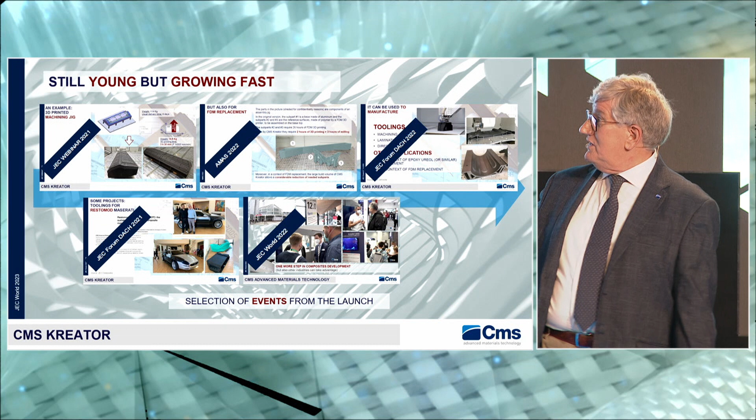Here you can see a selection of events where we have presented Kreator: the JEC Webinar 2021, do you remember the pandemic time? But also the JEC Forum DACH, and up to the last edition of JEC World last year, and the Forum DACH.

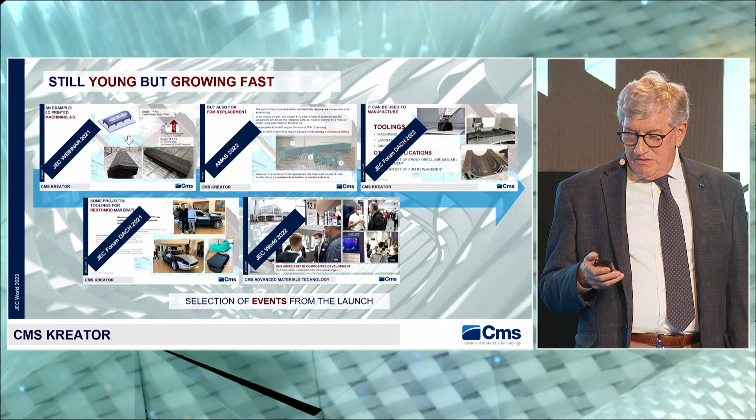The context is one of a technology growing fast. Do you remember, a year ago I presented the first slide coming from the Expert Digest of JEC Composites magazine, showing that the growth rate is more than 20% annually.

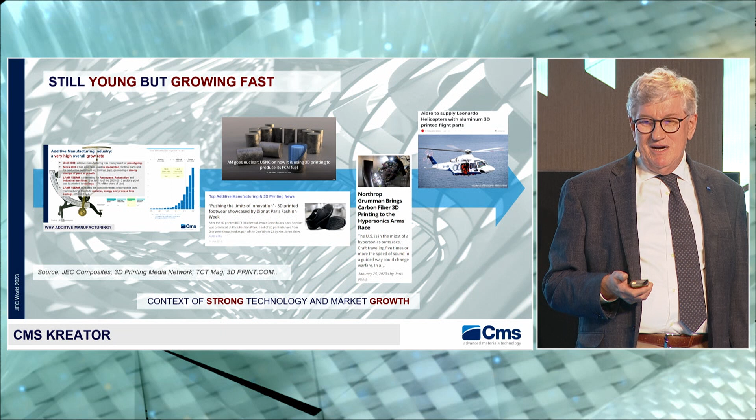But a lot of new applications have appeared in these years: AM going nuclear, nuclear fuel 3D printed, shoes - we have sport shoes 3D printed, but also continuous fiber 3D printed parts, and other parts for helicopters, for instance. And Kreator is also growing.

It's growing with a new 3D printing strategy, the 90 degrees 3D printing.

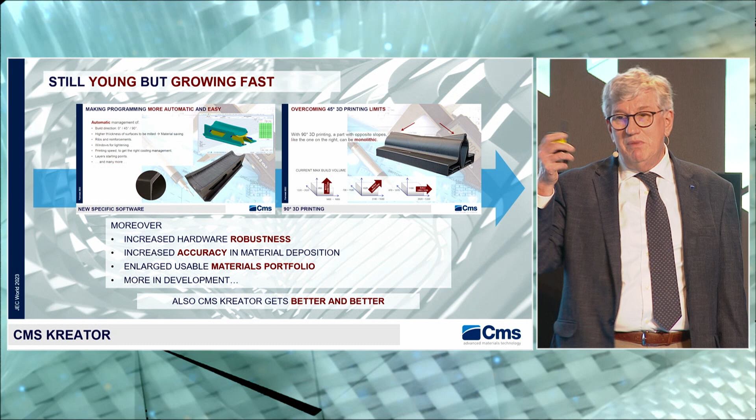Why 90 degrees 3D printing? Because with 45 degrees 3D printing, you can have just one slope - you can grow, but not go down. With 90 degrees 3D printing, you can print a monolithic part like that, instead of two parts collected together.

An important manager said in a conference, from a sustainability point of view, the best part is no part. Instead of having two parts, having only one part is very good for the sustainability of the process.

But also software - a new software to make programming easy. Large format additive manufacturing is a very peculiar technology, needing very peculiar, specific software. We made a new software with another company, specific for our Kreator solution, to automatically manage different 3D printing strategies: vertical, 45 degrees, 90 degrees.

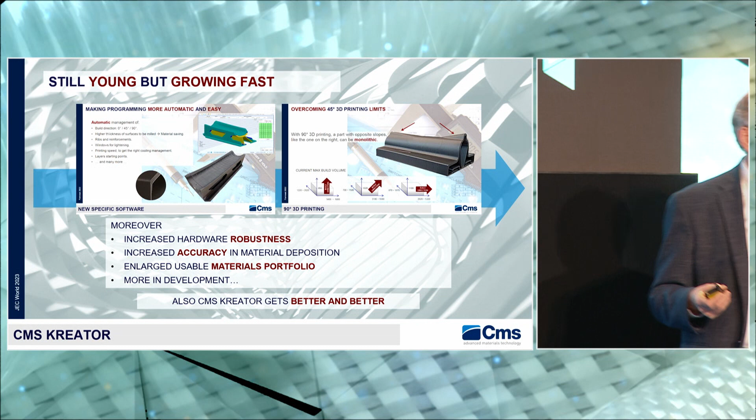One point very important for material saving: we're speaking about toolings. Toolings usually have one operating surface to be milled, for the lamination or machining of the part in the case of a jig. So the part needs much more material at this operating surface than elsewhere, because this surface has to be milled down to get the needed accuracy. With this software, you can simply identify the operating surface, and it provides higher thickness just in that surface, not in the whole part.

Another point is the easy creation of ribs. When you have a tooling to be milled, the part needs to be very stiff, because vibration during milling must not compromise the accuracy and the quality of the surface. So having ribs means a more accurate part to be delivered.

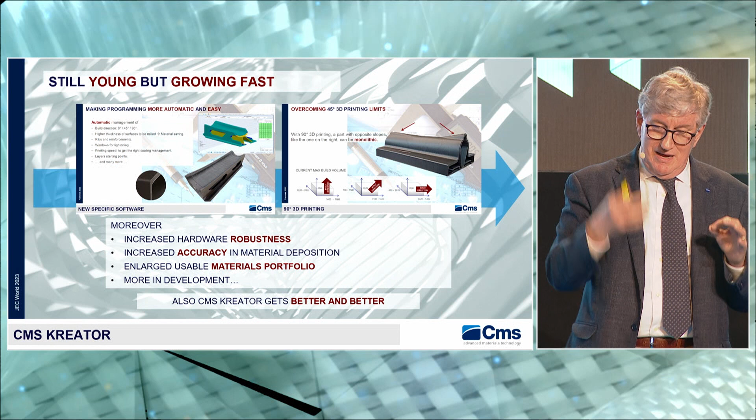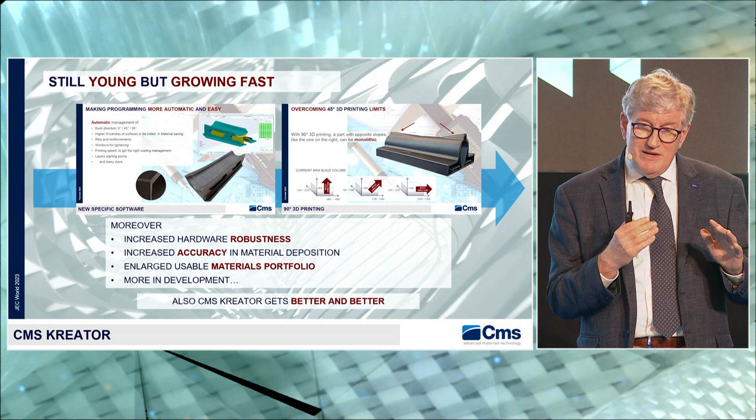The definition of ribs isn't done with a CAD designing each rib one by one - you simply identify the plane where the ribs need to be 3D printed, and the software automatically arranges the printing path and slicer to create the ribs.

Another point is the creation of windows.

You can see some parts that are lightened by windows to remove some material and make the part easier to handle. With this software, we can print the part with the 3D printed windows, without the need of adding the milling of the windows in the milling program.

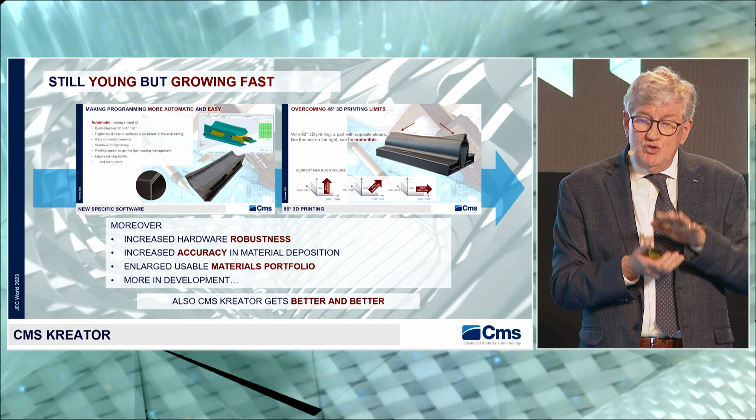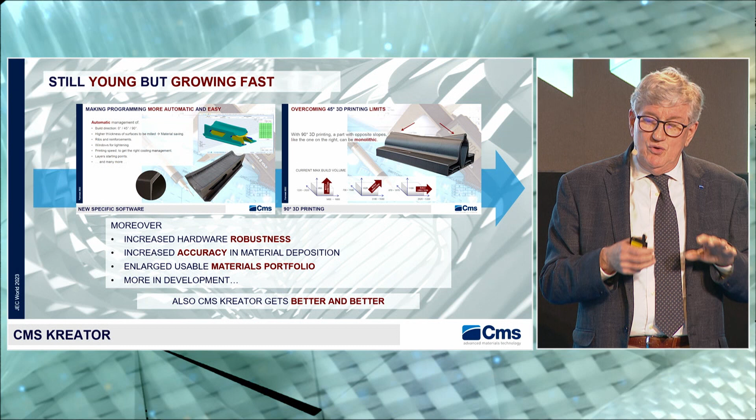Also the automatic management of the temperature. If you know something about large format additive manufacturing, you know a crucial point is the management of temperature. With the new software package, you have automatic management of 3D printing speed in relation to the expected temperature. So before starting, you can know if the new layer will find the right conditions for optimal adhesion or not. If not, you cannot print the part. If yes, you have a perfect part.

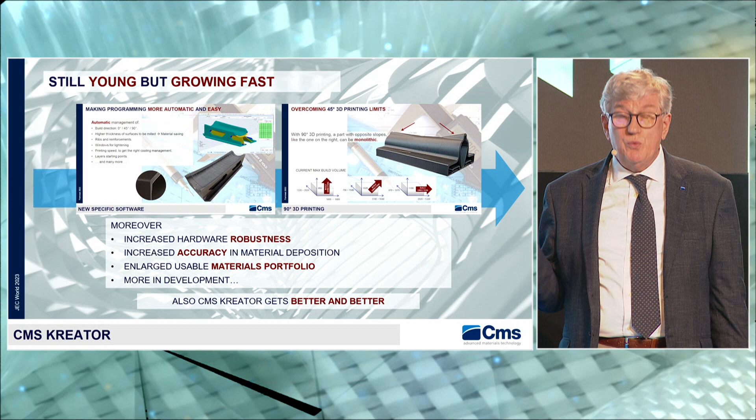Another important point: we have increased the robustness of the hardware. We have increased the accuracy of material deposition, and we are working to improve this more and more. We have also enlarged the material portfolio.

But at this exhibition, we are launching the large build volume and large mass flow machine just for 3D printing. It is a large portal having finally the new 100 kilogram per hour extruder at maximum, with some interesting features. That is a 6 model having a huge build volume at maximum.

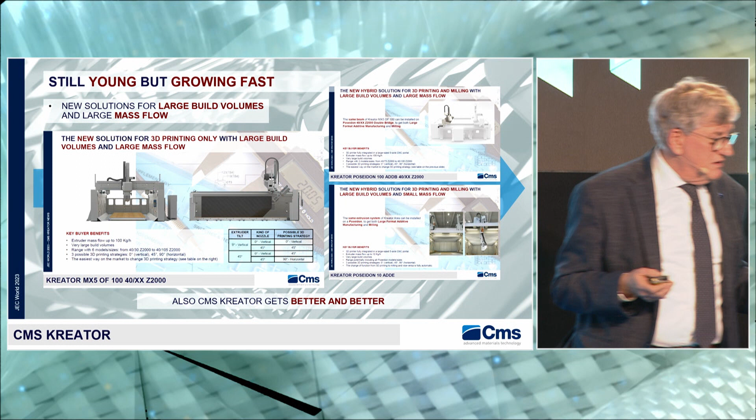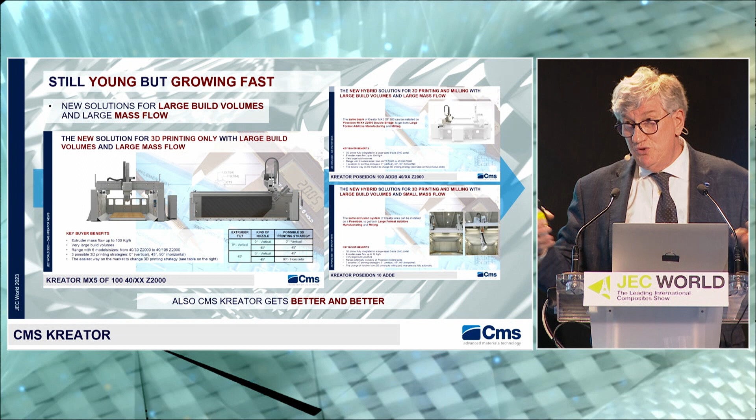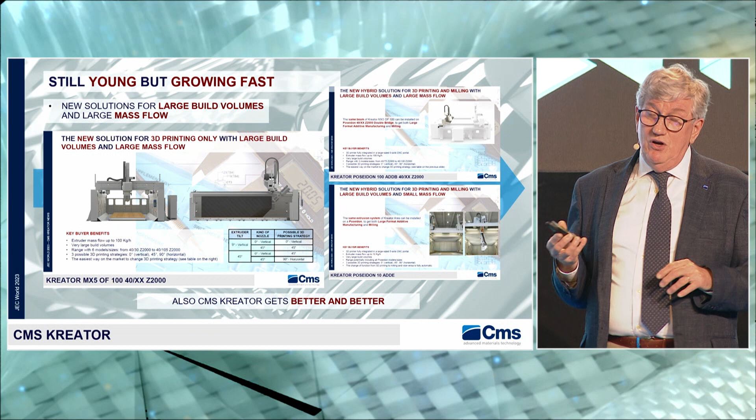Let me check on the screen. We are speaking about 4 meters by 2.5 meters, because you have to remove something, up to 10 meters long. Not bad. But also the possibility of adopting one of three 3D printing strategies.

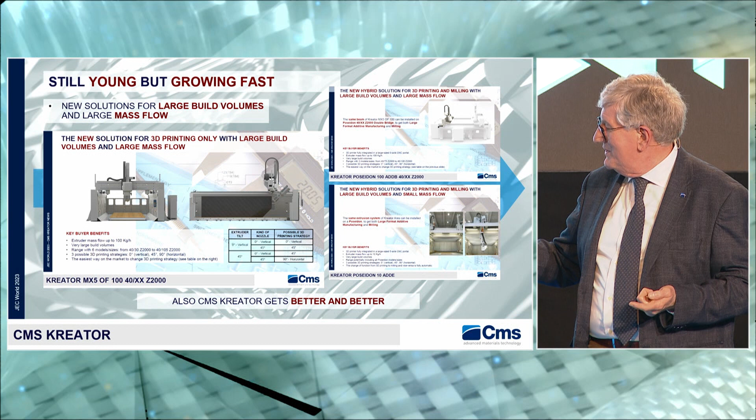Summarizing: with the vertical nozzle, you can perform vertical 3D printing. With the 45 degree nozzle, you can perform 45 degree 3D printing. With the 45 degree nozzle and tilting the head by 45 degrees, you can also 3D print at 90 degrees. It is the easiest way on the market to change 3D printing strategy, finally.

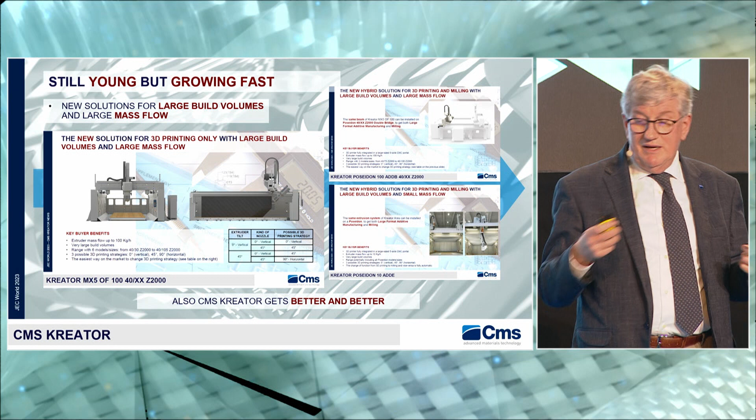Together with this model, we are launching other models of large portals. I think less important, but anyway available. With the same beam, having 4 meters of stroke, we can combine two double bridge machines to get 3D printing and milling. It is a special machine, something like that.

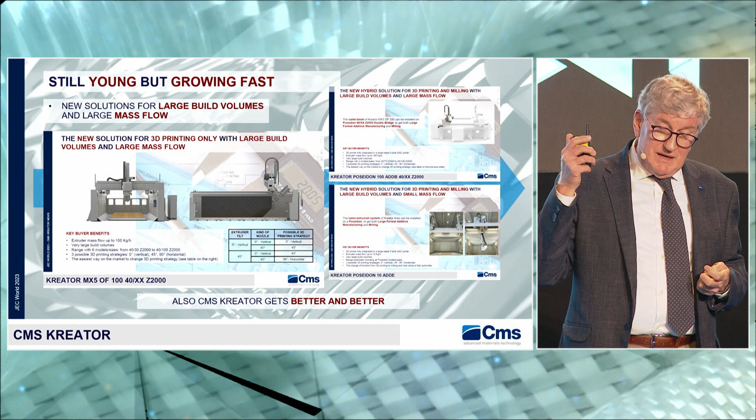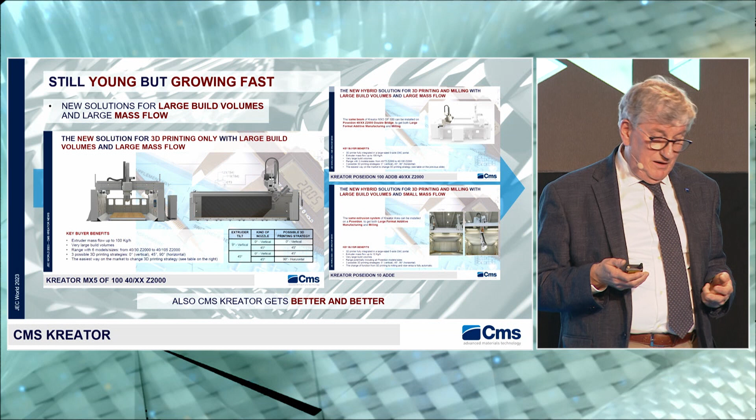And we have finally defined and put on a price list, not treated as a special anymore, the current extruder that equips the Ares installed on Poseidon. We have one machine delivered and another machine to be delivered with this small extruder.

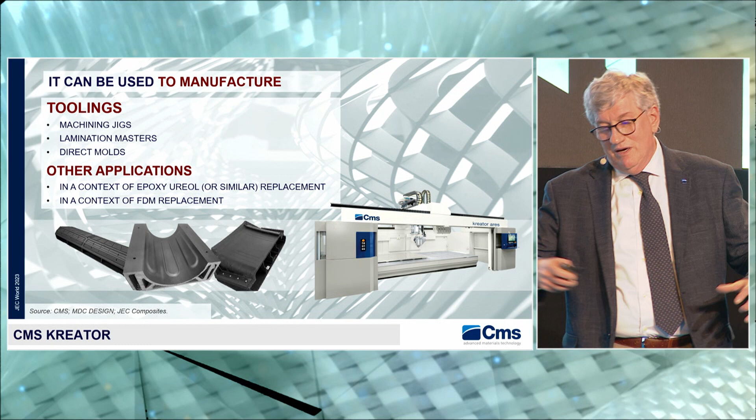This technology can be used to manufacture toolings, that is machining jigs, lamination masters, direct molds, and other applications in the context of epoxy Ureol replacement, and also in the context of FDM replacement. Again, one monolithic part instead of a lot of small parts connected together.

Here are some examples of 3D printed and then milled parts. We presented these at Formnext last year. You can see it in the presentation, which I think will be made available, or anyway you can ask us for the presentation.

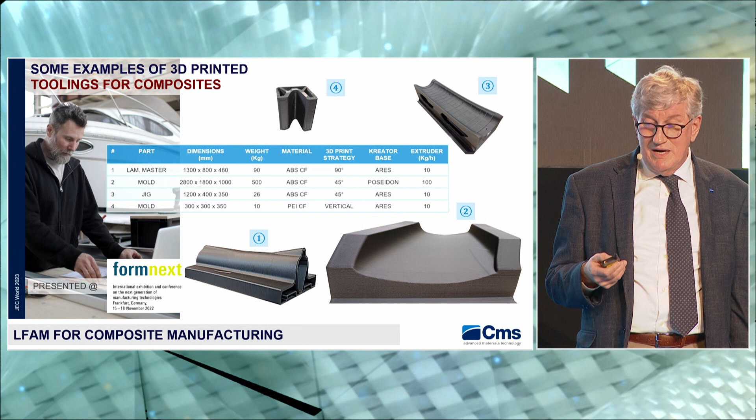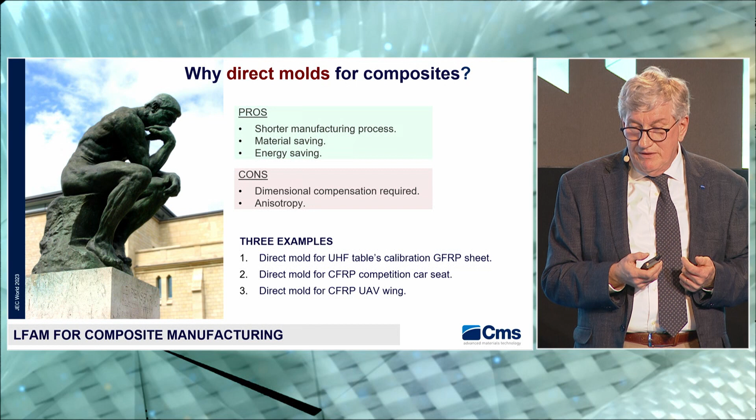Why direct mold for composite? I already spoke about that at JEC forum in the past. Pros: shorter manufacturing process, material saving, energy saving. Cons: dimensional compensation required, and the anisotropy of the 3D printing material. Three examples.

This example was already discussed at the last JEC: the 3D printed and milled direct mold for UHF table calibration sheet. Let me remind you, the UHF table is a table equipped with up to 100 or more independent vacuum cups that can be oriented and placed.

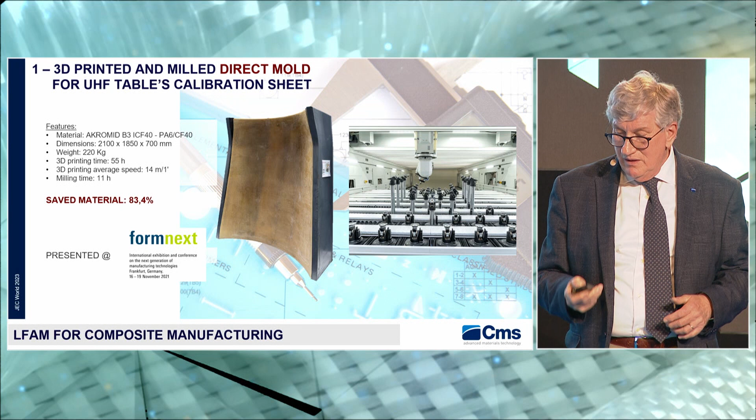And also a direct mold for a CFRP competition car seat.

And another direct mold of a customer of Kreator for United Aerospace, for the lamination of UAV wings, an unmanned aerial vehicle.

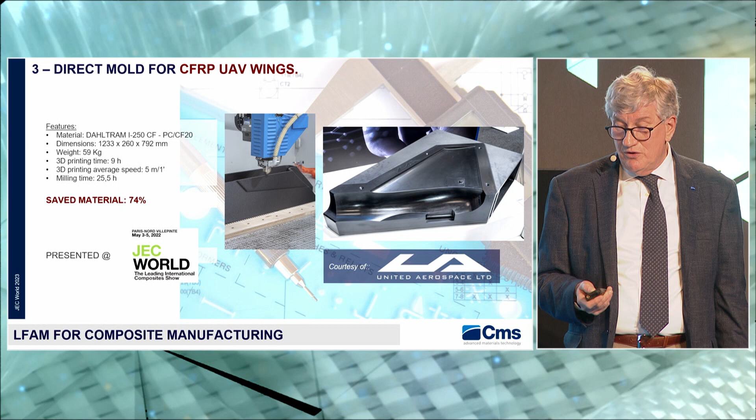But does LFAM really help sustainability? Having this question in mind, we commissioned the company RINA, a well-known consulting company, to conduct a study focused on direct mold for CFRP, just to get some figures.

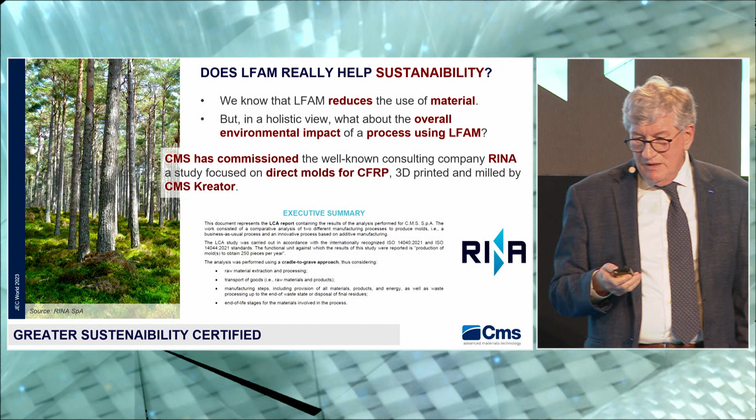About the sustainability of the process, the study considered the business-as-usual classical process: cutting of epoxy board, gluing of epoxy board, milling of epoxy board to get what is called the model, then lamination of the CFRP mold, because classically the mold for a CFRP part is made of CFRP itself, then curing in autoclave, considering all the flow of energy entry and waste released.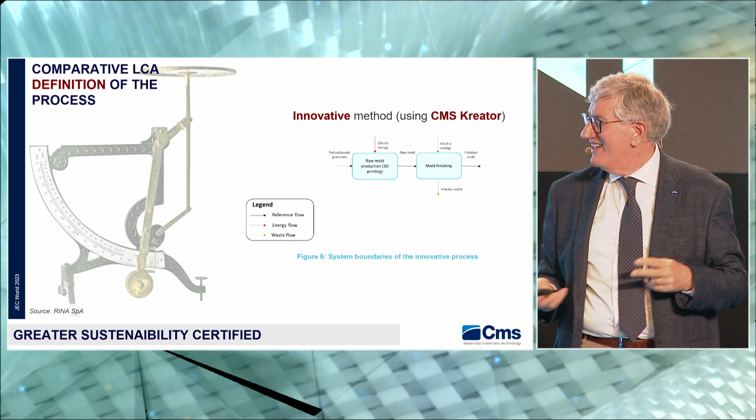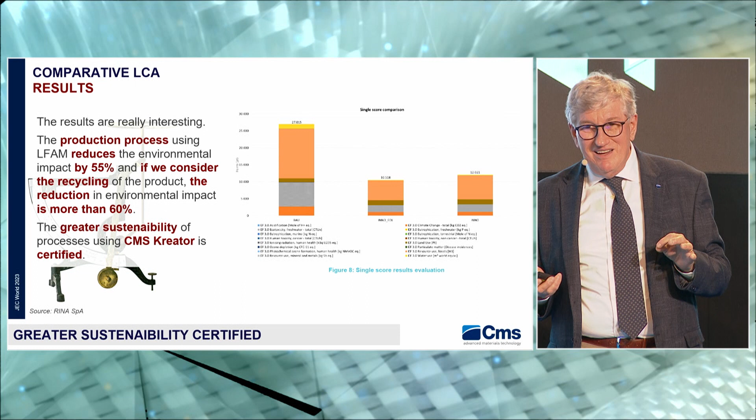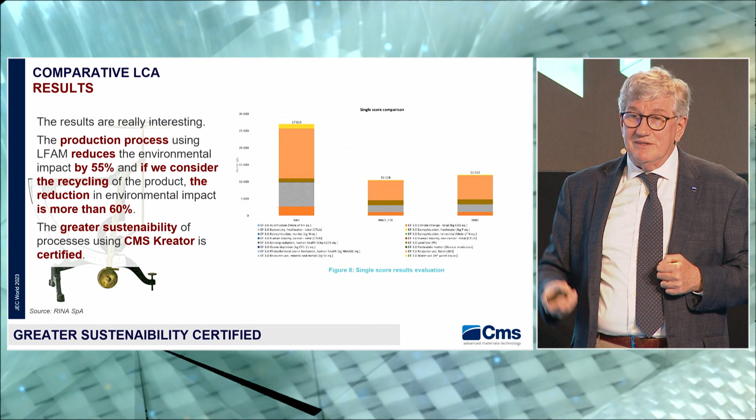But we also have 55% less environmental impact. And if we consider the recycling of the material with which we manufactured the mold, more than 60%, certified by RINA, that is Greater Sustainability Certified.

But finally, are customers appreciating this? This is the final point, because all is good, all is a good thing, but what do customers say? Well, in the early stage of Kreator ARES, we...

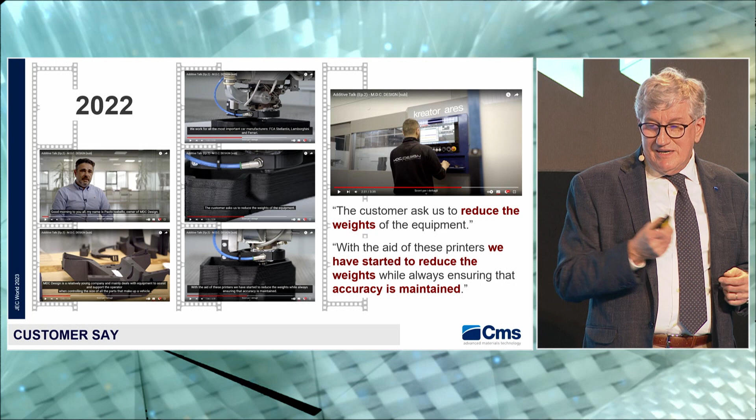By 2022, one of the two founders and owners said their customer asked to reduce the weight of the equipment. We have seen before that we are able to reduce the weight of the part up to 5 times compared to the same part manufactured by subtractive methods, because we can manufacture an empty part. With the aid of these printers...

They are calling it printers. We have started to reduce the weight while always keeping the accuracy. After 1 year, in 2023, they said, well, every new technology—I think everyone knows this—is not a walk in the garden. It needs a lot of effort to learn the best way to use it, to improve the technology together with the manufacturer of the technology. A good result is when the manufacturer and the customer work together to make the technology better and better. So CMS and MDC committed themselves to consolidate the technology, and for the last 6 months, I think we can say we have been using Kreator in a much more industrial way.

Kreator is used in our manufacturing of parts for customers like the other machines we have, and it provides, in addition, the benefit of additive manufacturing. All this while maintaining the required accuracy, as I already told you 1 year ago.

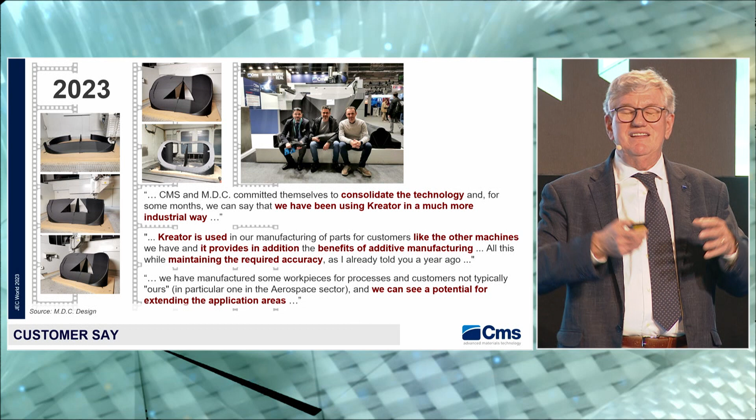But last but not least, using Kreator, they are enlarging their portfolio of parts, also into sectors not usually covered—that is, apart from automotive, also aerospace. We can see a potential for extending the application area. I think it's a very good result.

Finally, high flexibility—that is, integration, a 100% integration between a 3D printer and a machine tool. Material saving, up to 5 times the saving of material compared to current technology, but also compared to competitors. Sustainable solution, certified by a serious study. Lower environmental impact, and an industrial solution certified by the interview of our customer.